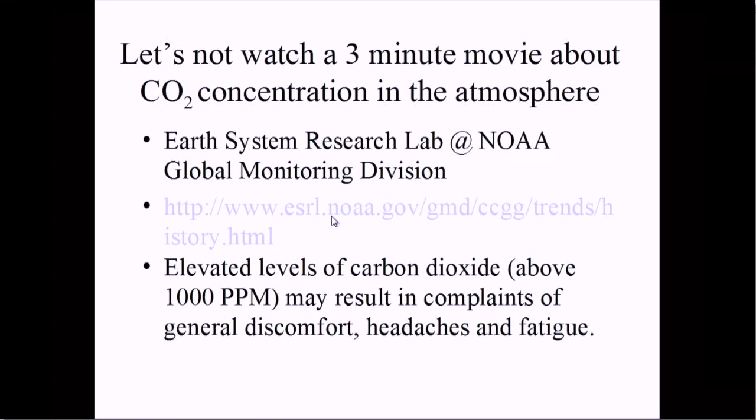So if you go to this website, you can watch a 3-minute movie about CO2 concentration in the atmosphere. It was done by the good folks at NOAA, and I won't go through it completely, but we've been monitoring the CO2 in our atmosphere very closely since 1958. And it doesn't look too bad there. It looks like a nice linear curve, which will eventually go to infinity.

But the question is, what's the slope of that curve, and what does it look like in the long term? So if you look at that over the long term, going back to early man and woman, and we can measure this by bubbles in the ice cores that they've been measuring. So these are different data points. You can see that it does fluctuate, and so people are always saying, well, global warming is a natural fluctuation, but really it never gets above 300 ppm until about, well, here's the Lascaux Art Cave.

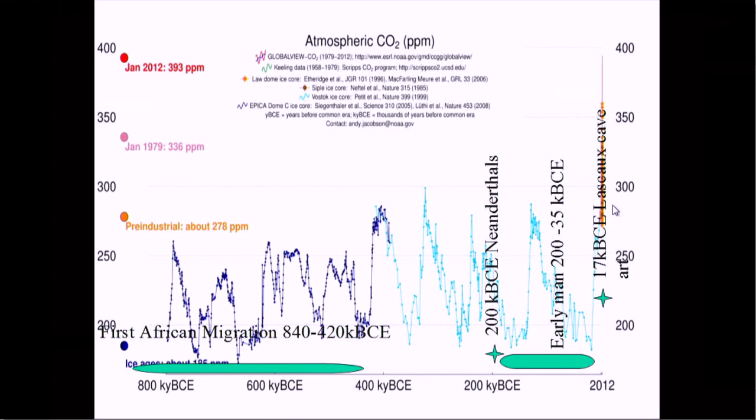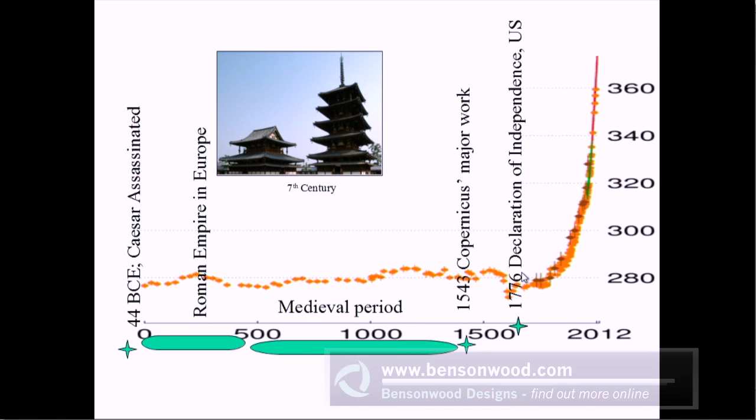So let's zoom in on that orange bar, and you can see that even after Lascaux, through the Roman Empire, through the medieval period, I like to show what we were doing with wood in the 7th century here in Japan. Carbon dioxide is still pretty low. And then, well, I won't blame this on the Declaration of Independence, but that's really when it starts to jump.

So this is, sorry for jumping around here, but this is an infographic that was down in Boston this summer in a show that I'll talk more about later, but it charts the history of trees over that time as well. And so 320 million years ago, trees started. And you can see that we did a lot with trees, but right about here, 1830, lumber shipping, balloon framing, this is when the sawmills, the Industrial Revolution really started taking over.

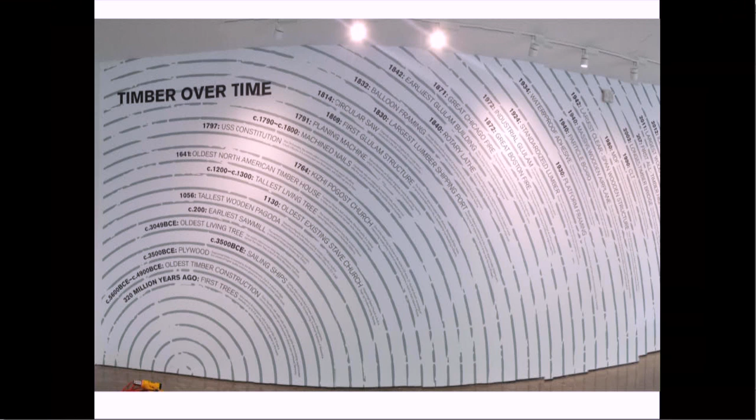And in 1871 and 1872, there were two large fires in urban areas in our country that sort of turned people off of wood, the Chicago fire and the Boston fire. And that, combined with the cheap energy window opening, really started paving the way for steel construction or iron construction to come online in the urban environments.

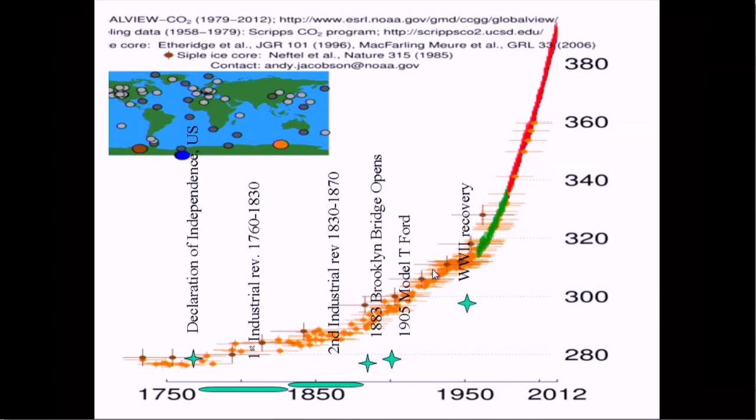Now, when you think about that CO2 graph and you think about the world population growth, it actually is a pretty interesting mirror of one another. And so the question is, where is this CO2 graph going to go, and where is the world population going to grow? So this is the world population over the last couple thousand years. And here's the predictions out of the UN as to where we're going to go.

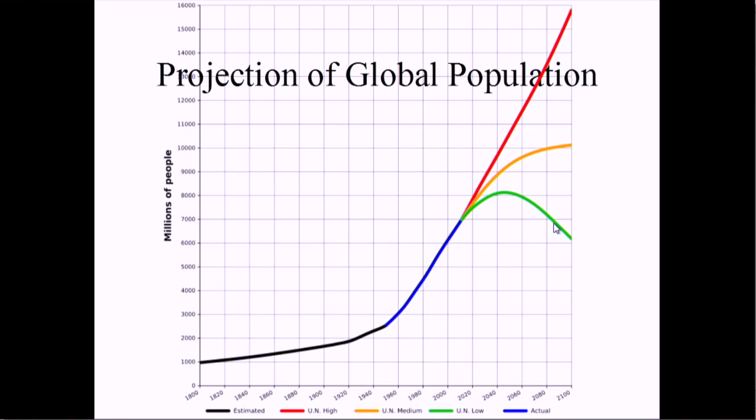Are we going to go on this red line and have 16 billion people? Or are we going to curve off, or are we going to have some major problem and start going backwards? Or some other reason to start going backwards. Right? It doesn't have to be a problem. It can be a recognition of a problem that we might have. Absolutely.

And so we think that there is a problem with the carbon dioxide concentration at 400 ppm. Scientists are saying 350 actually, and that the 2 degrees C is pretty much inevitable at this point. Right. At 1,000 ppm, people start to get tired and have headaches, and so if we get to that point, we're definitely in trouble. So we can argue about where the best point to be is, but we know we're on a bad track right now, and we need to do something about it. And so what we need is solutions.

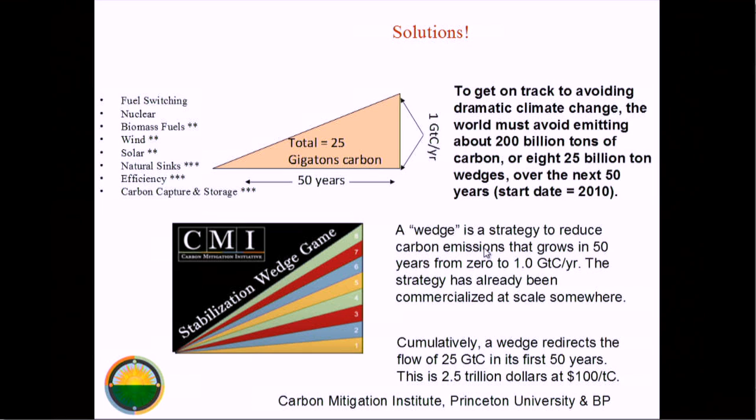So a couple of years ago, the Carbon Mitigation Institute, a group out of Princeton, came up with a way to visualize the carbon problem. So here's the historical carbon emissions, and this is from 2010 to 2060 if we stayed on that same projection where we're headed. They took this triangle here and they said this is the theoretical stabilization triangle.

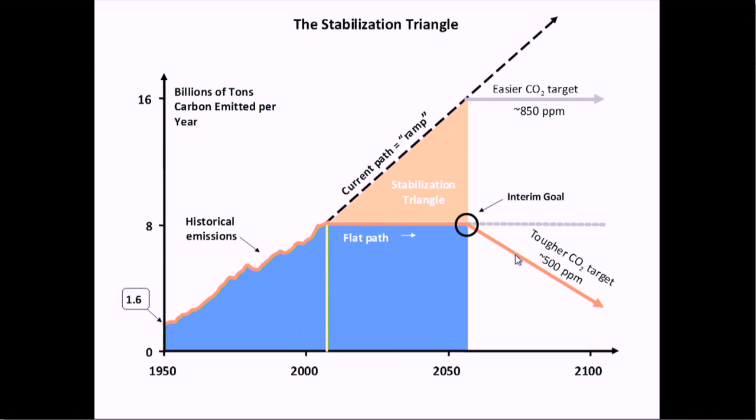If we can not put that triangle into the atmosphere, we can stabilize our climate, and then maybe eventually we can actually start turning around and getting into something that's more what we want. The UN has said that in their best case projection, we would be in a carbon negative economy by 2060. That would be wonderful. So I think we can do it before that. And that's probably where that is, 2060, headed negative. And we need to. We need to for our kids and our grandkids and their kids.

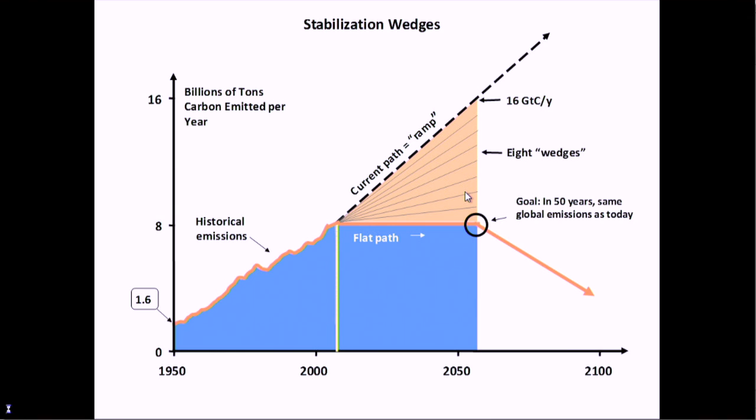Yep. And so they took this stabilization triangle and, like good engineers, they broke it down into smaller problems. They broke it down into 8 problems. And they called each one of those a wedge, and each wedge represents a certain amount of carbon. And these wedges are things that we have done as a global society that are demonstrated technologies that can be done. So we can do this. And actually this is 5 years old. So we can do this exclusively relying on technologies that we already have developed.

Exactly what I'm saying. This is 5 years old, and the technologies have changed. The stuff I'm seeing at 40 cents a watt is just outrageous, the way technology is changing. So we can do it sooner than 2050. We can, absolutely. I have no doubt of that.

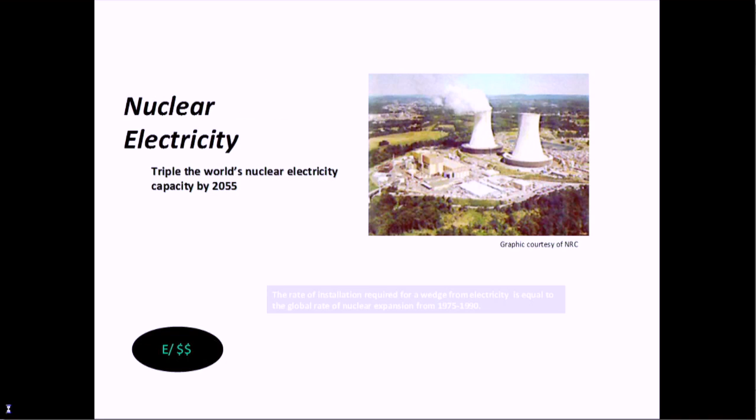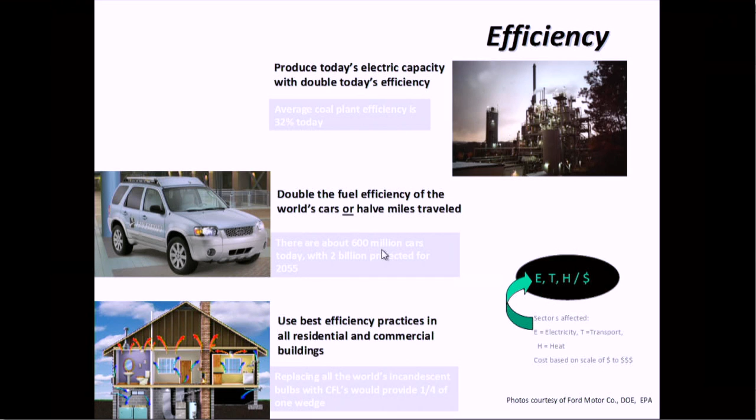So some of these have problems or are expensive. Nuclear electricity takes a long time to build a new plant, but some of them are not that hard to do. Wind is not that hard to do. Solar is not that hard to do. Planting trees is not that hard to do. Efficiency is something that Rhiannon and I work on every day. Carbon capture, you showed the early thing in the last show.

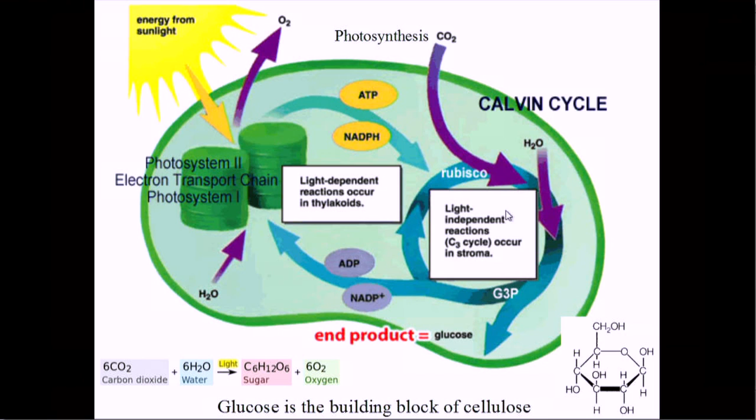And the beauty about doing this, instead of pumping it into a hole in the ground that it's eventually going to escape from, is that while it's being stored, it has use. We're living in it. And it's beautiful, and it provides for a comfortable life. So this is how energy from sunlight turns into glucose, which eventually turns into cellulose inside of the plants.

And so I've been going around telling people we're building these wedges, these 1/8 of that stabilization triangle, for a number of years here. This is a project we built in Maine that had a bank of solar panels on the roof. It also had a bank of solar panels in an old abandoned tennis court nearby. And this project is net zero, LEED platinum, FSC, Forest Stewardship Council certified wood throughout. It operates with no annual electricity costs.

And this is in northern Maine. Does that include heating? Includes heating, includes everything. Lighting, heating, everything this person requires, outside of transportation, probably. This is not a person, this is an institution. The Coastal Maine Botanical Gardens in Boothbay, Maine. Oh, yes, of course. And we built this between them closing one fall and opening one spring. So we built this in the dead of winter in northern Maine, mostly in our factory, which is in New Hampshire.

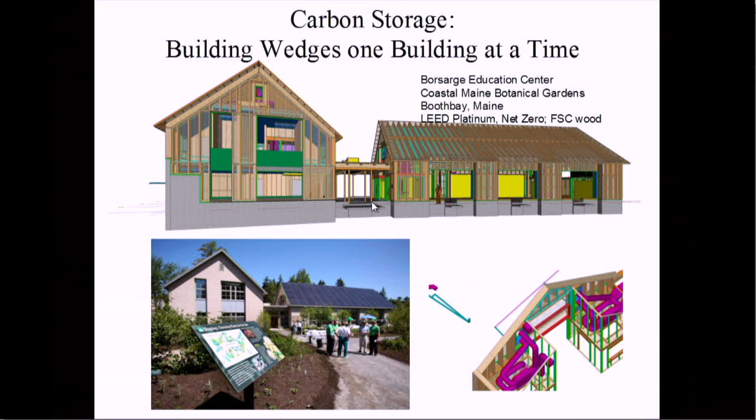Right, so you can see how we are modeling everything in CAD, and we take those sticks and we put them through a CNC process, and we build them up into our highly insulated large panels. And so this is what wood is. It's cellulose, which is basically 50% carbon by weight. The glucose molecules get bound together, they turn into cellulose molecules, they turn into these long fibrils and fibers, and those fibers turn into wood. They're basically big bundles of cellulose straws.

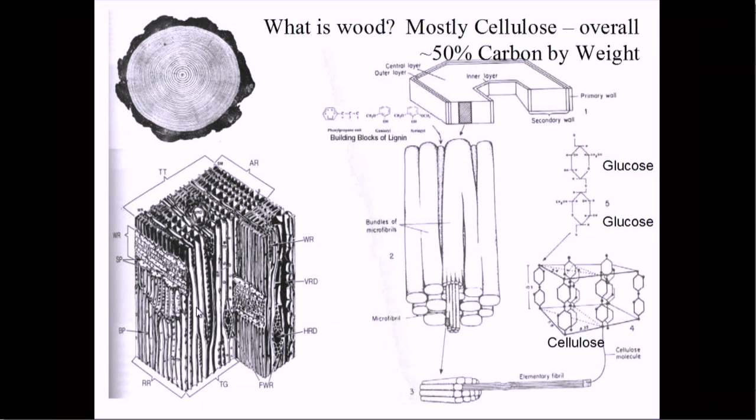Which is why wood is strong. Yeah. It's because you've got a lot of not terribly strong, but very long and somewhat strong fibers that are all bound together. The superorganism. Yep, they're all working together, and that makes wood strong. But we can also pulverize this wood and turn it into insulation, which we do now.

I wouldn't say we've completely abandoned the foam core stress skin panels, but in a lot of our buildings, we are now using cellulose insulated panels. This is made out of old recycled books that get ground up and injected into our panels and give you very high R value, again R30 to 60, depending on thickness.

Do you use cloth for this, clothing? That kind of thing? No, they do sell cloth insulation, but this is old books that they grind up. Old books. Yeah, and the beauty of this is also when you're putting this insulation into the panels, some of

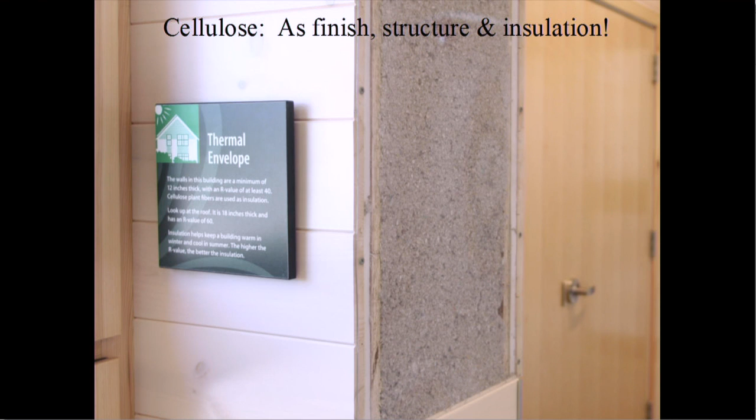it inevitably falls on the floor, right? So what do you do with that? Well, if that was foam, and it's curing, you got to put it in the landfill. But here we just sweep it up and throw it back in the hopper, and it goes into the next panel. So there's really almost zero waste when we're building these panels.

I've been talking about these wedges for a long time, and I was so excited this March when an article came out in the Journal of Sustainable Forestry that really looked into what wood can do on a global scale. How many wedges or how many tons of carbon dioxide can it fix? Or by using it instead of steel or concrete, can it avoid being emitted?

What they found was that, I'll just read it, it could save 14 to 31% of global CO2 emissions and 12 to 19% of global fossil fuel consumption using between 34% and 100% of the world's sustainable wood growth. And sustainable is very important here. Absolutely. That means you're not wrecking forests doing this. No, the wood that we get comes from forests that are replanted at a rate equal to or higher than they're being cut and used. So we really are continually fixing carbon from the atmosphere.

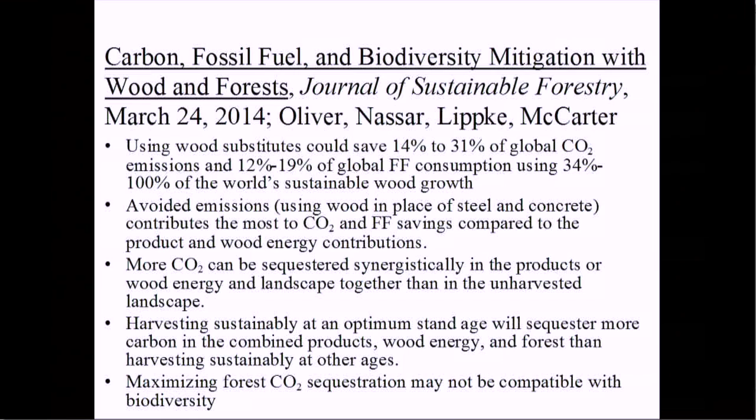I want to point out something, and that is that I promised people that we were going to show how Bensonwood was going to save the world. And I think we're showing that. We're getting close. But we don't want to be the only ones. Bensonwood, we're the tip of the iceberg. What we need is a movement here, and it's starting. It's starting in Europe, it's starting in Australia, and I want to show you some examples of those.

I think that Ted Benson should get some ping pong players and go to China. Well, we have a rich history with Japan. We have not really made contacts in China, but it's not too far away.

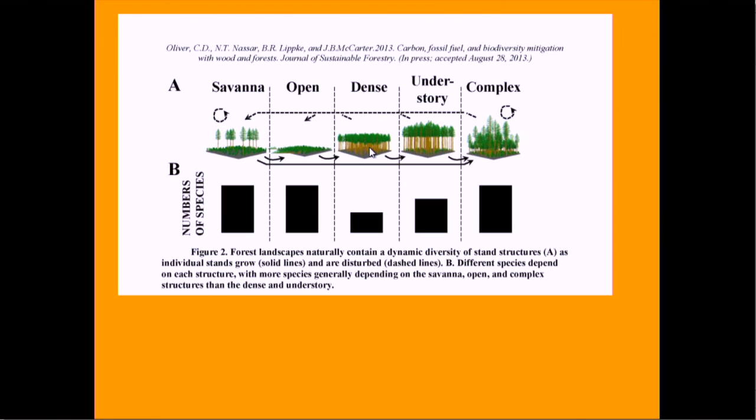I do want to point out that there are lots of different types of forests, and if your only goal is to sequester carbon, you probably want to use this dense forest. But that is not our only goal. Our goal is a sustainable planet, and recognizing biodiversity and the resources beyond wood in the forest is important too. So by using certified forests, we're allowing other types of forests to develop naturally and exist in this world.

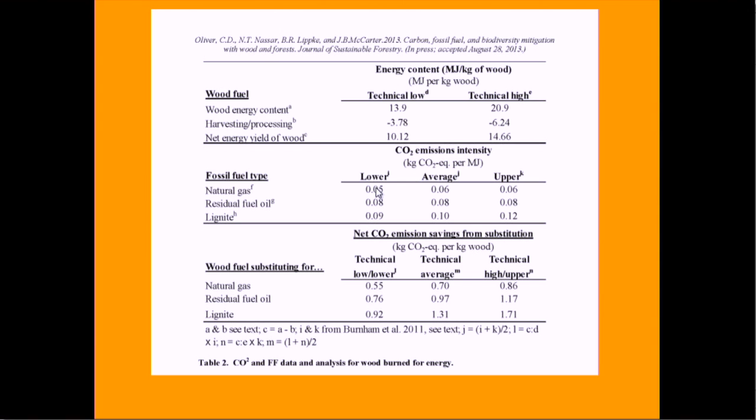So in this article, they looked at how much energy it takes to make wood, how much energy is in the different types of gases and fuel. They looked at how much energy it takes to make steel, concrete, brick, aluminum, all these things. And if I can stop you just for a second, concrete is one of the biggest sources of carbon emission. 3 to 5% of global carbon emissions are due to the annual use of concrete. It's a very considerable thing.

And if we could reduce concrete use by 50%, which is conceivable, we could reduce carbon emissions by a lot. And in fact, if we did it properly, we could be reducing it by more because we'd be sequestering carbon in the process. Exactly. Right. So this is a very big consideration. And that's exactly what these graphs out of this article show.

So when you're talking about I-beams now, you could be making skyscrapers out of wood. We're going to get to those. They look at the forest management. We'll put this up, but don't flip back to it yet because I want to keep on these. So that's where we're going. We're going to wood skyscrapers, mass timber for dense urban environments. This is amazing. It's what we need to do. This is really thrilling. Yeah, it's exciting to be a part of this industry right now. The innovation in wood technology has really evolved dramatically.

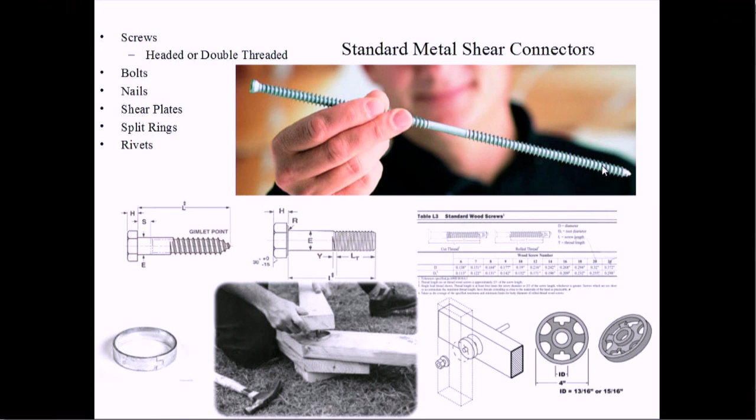Right. So along with these new wood products, we've also got new connections, screws that are a meter long. I can buy a meter long, fully threaded screw now. That's incredible that I could do that. Why do you need that? That's a much more complicated thing. But we can build amazing buildings. Look at that. This is the Cathedral of Christ the Light in Oakland, California.

Wow, that's impressive. This thing has been built. To give you a sense of scale, the concrete at the bottom is 12 feet tall. These glulam arches are 128 feet long. This is in Oakland, California, which is a seismic zone. Is that a photograph? Yes, this is a photograph, not an artist rendering, not somebody's wild imagination. No, it's real. It's real.

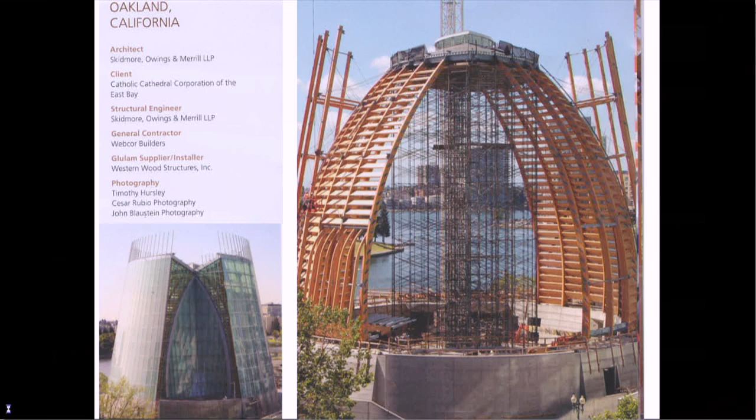This replaced the cathedral in Oakland that was destroyed in, I believe, the Loma Prieta earthquake. This was the third place design. The Catholic Church had a design competition, and the first place design went into design development, and they couldn't get the project in budget. So they went back to Skidmore, Owings and Merrill, and said, "Can you do this for the budget?" And they said yes, and they got the job, and they just built it.

Look at the scaffolding on that. They put up this amazing light fritted oculus, and they brought these glulams down on the boat from British Columbia, because you can't truck something that long. Oh, of course. How long are those things? 128 to 130 or something. Are those things called crucks? You might call that a cruck, yeah. That's a modern cruck.

A cruck, for anybody who doesn't know, is those beautifully shaped trees out in the woods where the trunk of the tree is curved. And if you can find a bunch of those that are matched to each other, you can use them as structural members in a building where you have a curved roof. They used to do that in the Middle Ages. Now we make them to the shape we want them, instead of growing those trees for 300 years like they did at that abbey. This is absolutely astonishing.

Obviously, Oakland is high seismic, so there's a lot of steel cabling that reinforces this thing, but it is an incredible space. How tall is that? Well, that's 130 feet or something like that. So you've got a building that's 150 feet tall that is made out of wood. The structural elements are wood, pieces 130 feet long that are curved, and the thing is going to withstand the kinds of earthquakes you would have in California.

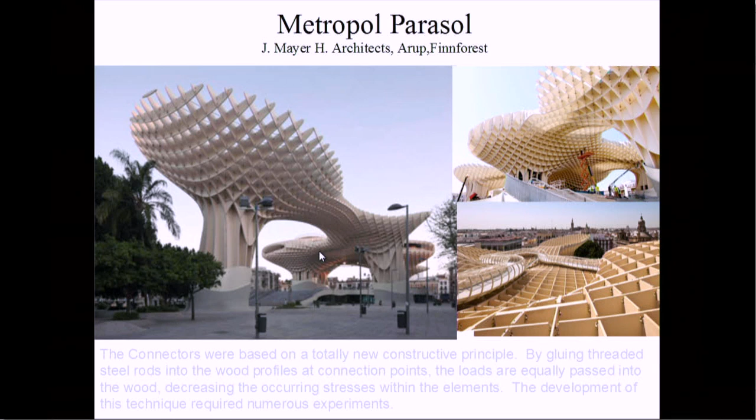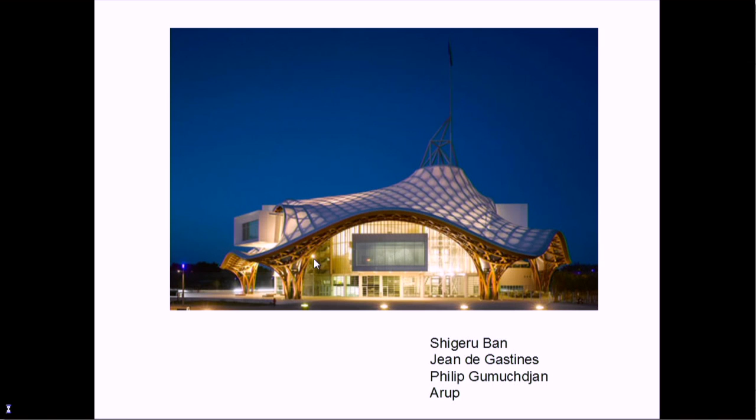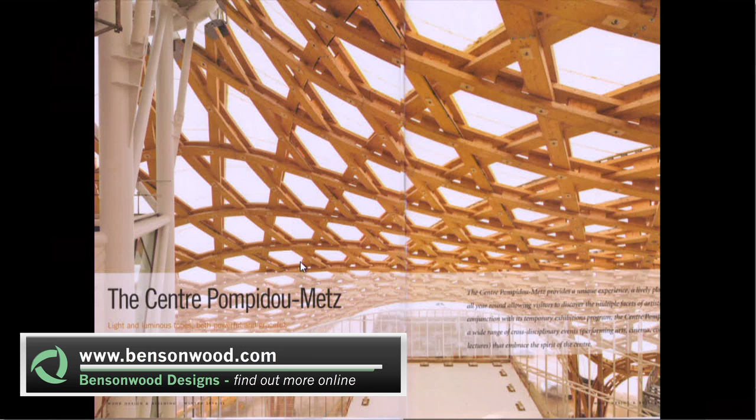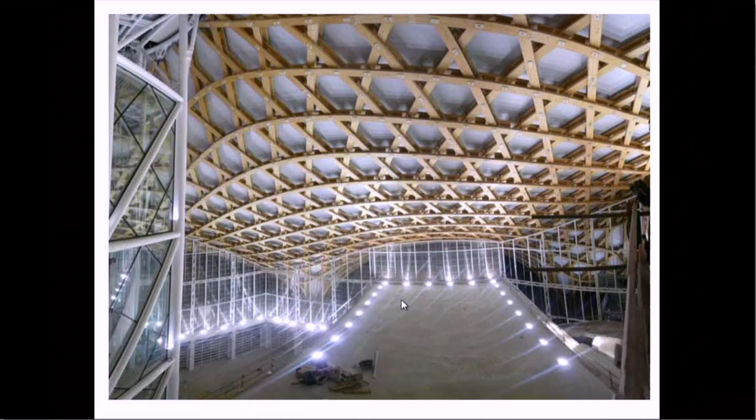Shigeru Ban, Pritzker Prize-winning architect, made this beautiful woven wooden canopy that is just incredible, what we can do with wood now. Look at that. That is stunning. That is absolutely stunning. I'm jealous of the poor engineers that got to look at all of these bolts and nuts and how they're connected. Well, this is why you want a screw that's a meter long. Right. Here's a shot of that same area at night. Oh, isn't that connection detail stunning? Oh my goodness gracious!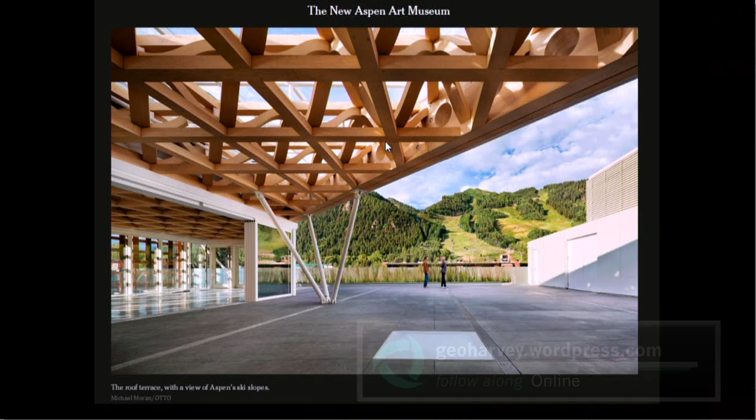But what I love about this building is the roof on the fifth floor, that you go up and have a drink at in the bar. This is a 3-foot deep assembly of a two-way truss that has these sinusoidal waves that are at a 45 degree to the main top and bottom chords. And I think it's 50-foot spans in here. Sinusoidal means curvy in a particular way. Yes. I think it's a modulated sinusoidal wave, but

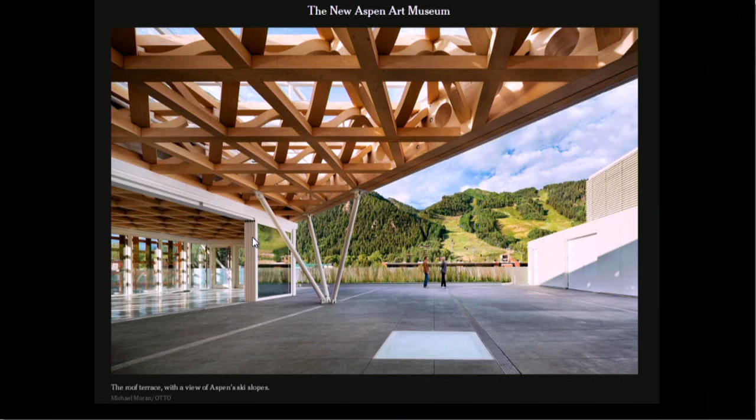we don't have to get into details. I just want people who are watching to understand what the word means. But this is Aspen, Colorado. Heavy snow load on a flat glass roof in Aspen. You're looking at the mountain, it's a ski run, isn't it? Yeah, spanning 50 feet out of wood. And this is all wood. Obviously, the columns are steel. That was an architectural statement, but it was a pretty incredible project. Oh my gosh! Look at this.

Here's a soccer stadium in Germany by this wonderful engineer. If anybody wants to learn about wood engineering, look up Julius Natterer. He's really the modern father of timber engineering, in my opinion. This is a soccer stadium that used solid logs for the main primary support structure, and then I believe glulams on top. And actually, this project used a timber concrete composite shell roof system. So on top of the wood decking, they were able to pour concrete to create further spans and give it more protection.

And so what I'm showing here is called cross-laminated timber, and this has been the biggest innovation in wood in the last decade. When we talked about glue laminated timber before, all the laminations were in the same direction. Right. Here, we are laminating pieces of small lumber orthogonal, or 90 degrees, to each layer, and we can do it in 3 layers, 5 layers, 7 layers, 9 layers. And that's where we get these 8 feet wide by 60 feet long members.

And I'm looking at this and I'm thinking, for a person to understand what's actually going on here, if you were to take a piece of the old type lamination in which the grain is all going in the same direction, you could actually split that with an axe. This thing, it would be a very long day. Absolutely. But it was really invented in the 90s in Europe, and it can compete cost-wise and structural-wise with poured concrete, with reinforced pre-stressed concrete.

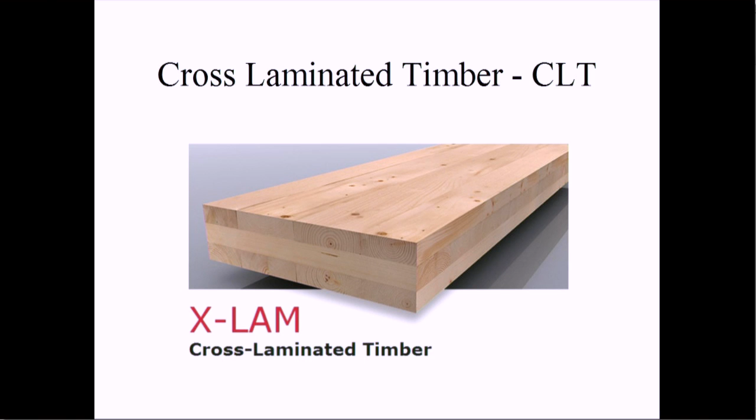The pre-stressed concrete industry can build a building very affordably. Now the laminated timber industry can build these buildings. We can span 30 feet pretty easily with these planks. We can build 20-foot walls pretty easily with these. This is a 3 or 4 story condominium that was going up in northern Quebec last year. The company in Quebec that makes the CLTs decided to build some condominiums in town. And so here they were using them for the walls, for the roofs. You can see the floors.

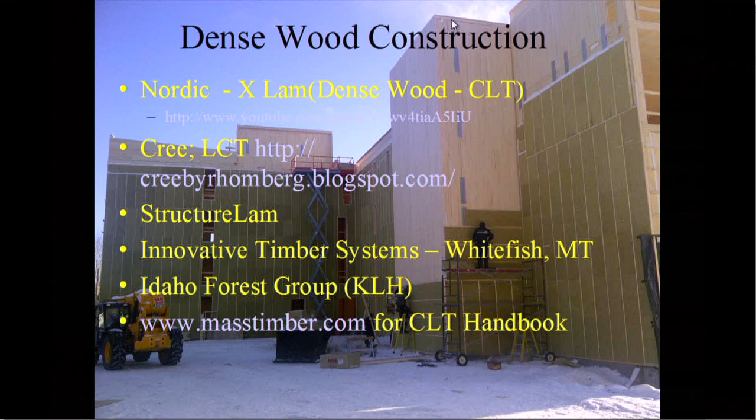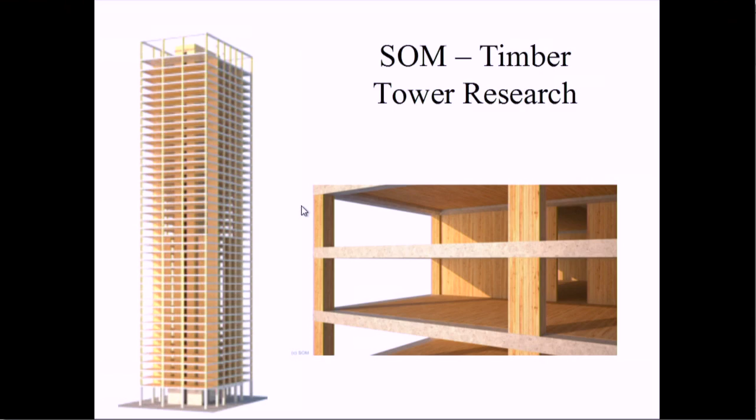As they got into it, they realized that there were some places like this ring beam where they wanted to use concrete for structural reasons. So eventually they didn't go to an all wood building, although they could have. But even here, comparing timber and conventional structure, this is wood, the orange, the steel is just a little red bar, and then the concrete is here. So the volumes are pretty similar, but because the wood is making up so much of the volume, the building weight goes down tremendously. Interesting. And when the building weight goes down, the foundation can be smaller, and we're not using as much concrete in the foundation as well.

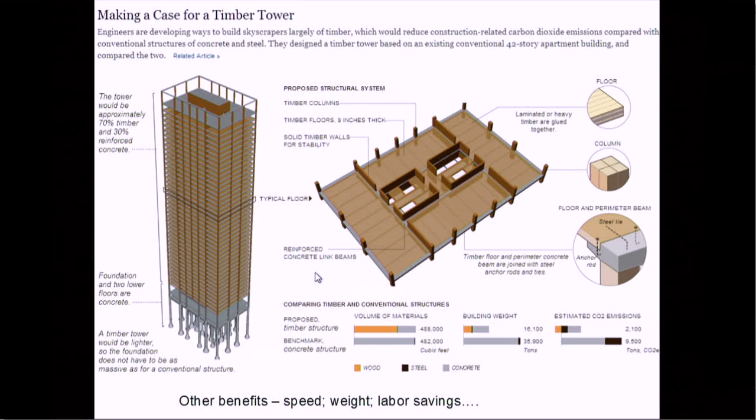Interesting. So when you look at the net CO2 emissions coming from each of those, you've got timber actually negative because it's storing, and then the steel and the concrete adding. So the carbon footprint is cut. Cut dramatically. So the same building out of concrete and steel is 9,500 versus 2,100. And these are innovations we don't normally take into consideration when we think about saving carbon.

Right. Well, we've talked about some interesting carbon-saving technology on this show, carbon farming and things like that, which most people just don't think about. Right. The idea of letting the grass roots go down farther. It's an interesting thing, but this is something where I'm gonna differ with you here. I think this is gonna get sexy. Well, with enough architects out there, it's definitely starting to get there.

What's going on here? We just lost our feed. Oh dear. There we are. It's just come back, it was sleeping. I think that was the computer objecting to the fact that nobody had touched the mouse. Yeah, I think you're right.

Okay. So this project here has been built in Austria.

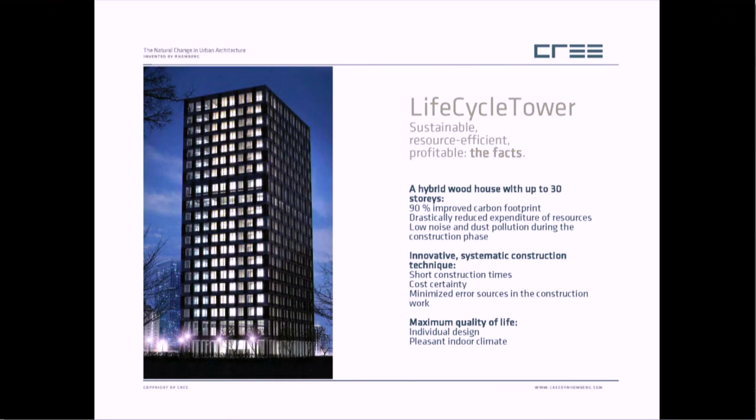A large Austrian contracting firm that actually does tunnels and highway and sort of civil projects decided that they were going to champion sustainability, and they were going to build a wood skyscraper. I love it. And it's going to be to Passive House standard.

So here's a cross-section detail of a timber. They actually did go to a concrete composite timber floor system because you can get a little bit more span out of it, and there's some fire rating and serviceability issues there that concrete does good things. Fire rating is of course important, and I will talk about that. Concrete is nice for that. Yeah.

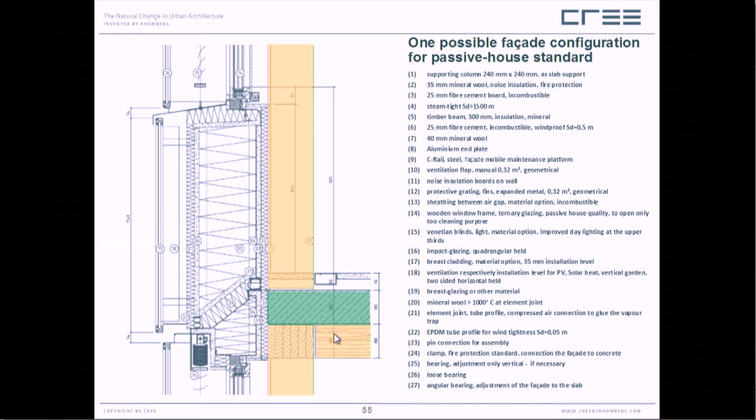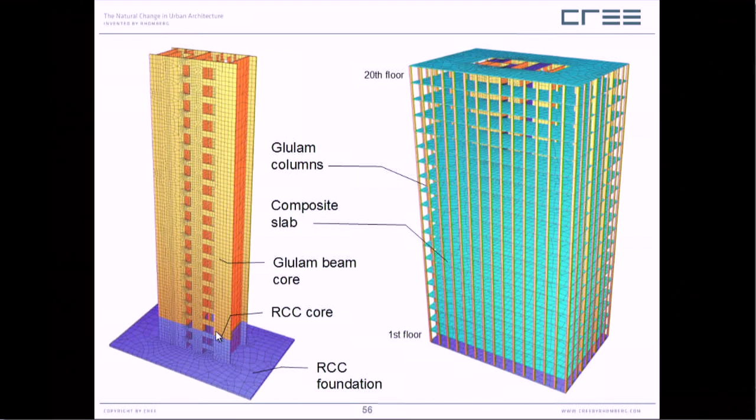But here's the structural model of what the buildings could be, glulams, and basically only the foundation needs to be reinforced concrete. And here's an example of one of these types of constructions, the same company. The first thing that came into my mind when I saw that was I could just imagine what Frank Lloyd Wright would have done if he had had this available.

Well, I'll tell you, this architect Hermann Kaufmann, he's got a good hand. He's a bright guy. He makes some beautiful stuff.

Yes, absolutely. And so here's a section again through the office building where you've got this glulam concrete composite floor system, and in between it they've developed these prefabricated factory mechanical modules that will slip up in there either to provide heating, ventilation, or lighting. And so everything can get built off-site, and these buildings go up week by week, floor by floor, basically a floor a week, which is drastically different than what a conventional site-built concrete or steel skyscraper would be.

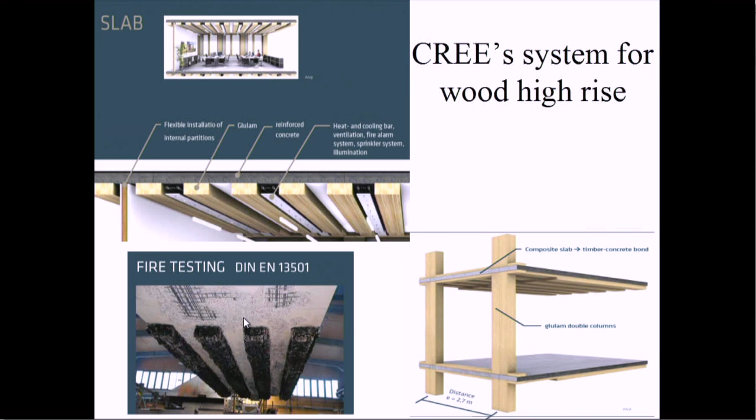In terms of fire testing, obviously that's one of the biggest things to overcome, but a lot of research has been done on fire testing, and wood has this amazing ability to insulate itself as it burns. It develops a char layer, and that char layer is an insulator and prevents the wood on the core of the beam from charring further. And so you can get out of these buildings before they fall down, basically.

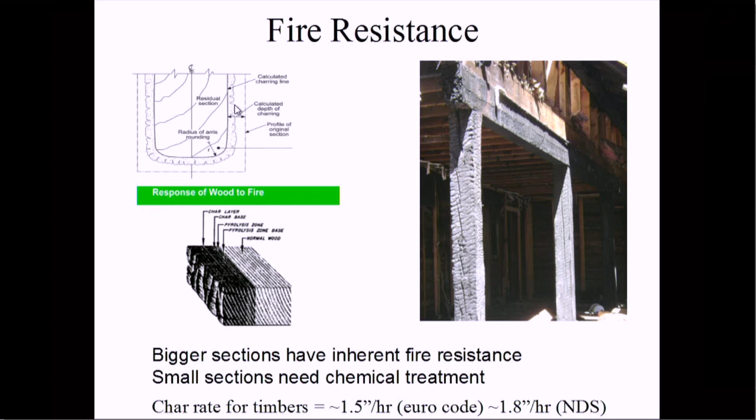And that's only true with the big wood. Yes, it's a function of surface to volume ratio. Yes. And so 2x4s, 2x6s, those big fires in the cities in the 1870s, those were smaller dimensional things burning, not the heavy timber. Yes.

But unfortunately, the codes were written to not allow wood construction above 4, 5, 6 stories. And that's what's currently in our code because of the history of stick framing. Well, what they should do is they should say, this isn't wood.

Well, that's one approach, but we are changing the code, and we've gotten these cross-laminated timbers and these glulams in the new versions of the IBC and the IRC, so that they can fall into the heavy timber category of the code. But eventually, we're going to get to the point where it's going to be a performance-based thing, and anything will just have to satisfy it.

And of course, as I see that, I think about the World Trade Center collapsing, and the fact that that was just a matter of the steel not being able to, and the concrete not being able to take the heat. Well, it certainly wasn't wood.

So this is stick framing in the lower left, heavy timbers in the upper right. I think you can tell, if you were a smoker, where you'd feel more comfortable lighting up is probably under the heavy timber roof, as opposed to starting a fire over your head.

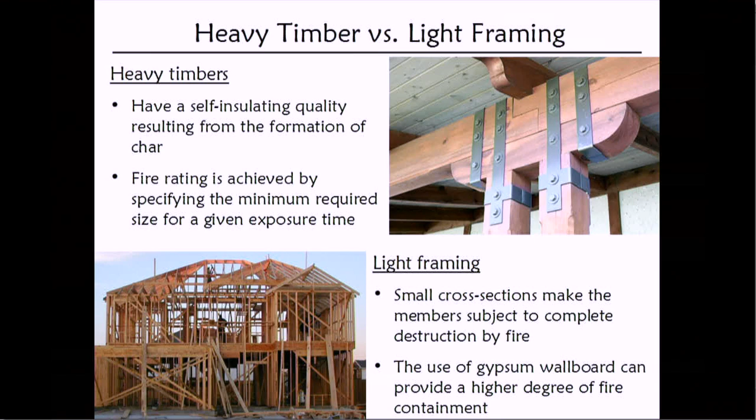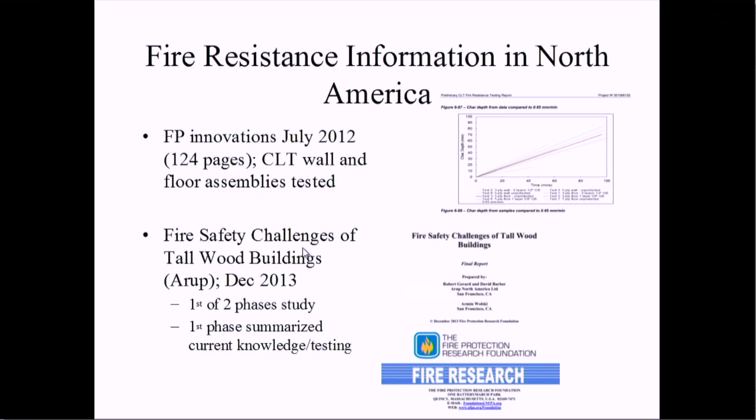So a lot of research has been done on heavy timber and CLT and the fire performance of it, and so we can make arguments to local code officials to sort of get around the code case by case, and that's what we have to do these days.

The USDA has just, well, they haven't actually announced the rules, but they've announced that there's going to be a competition with a $1 million prize to design a timber skyscraper in our country. And this announcement will be coming out probably in the next week. It was supposed to come out in September. Hasn't come out quite yet. But if you're interested, write down U.S. Tall Wood Building Prize Competition and get on the mailing list so you know about it, because I don't want to be the only one entering.

When you win, you can be on the show.

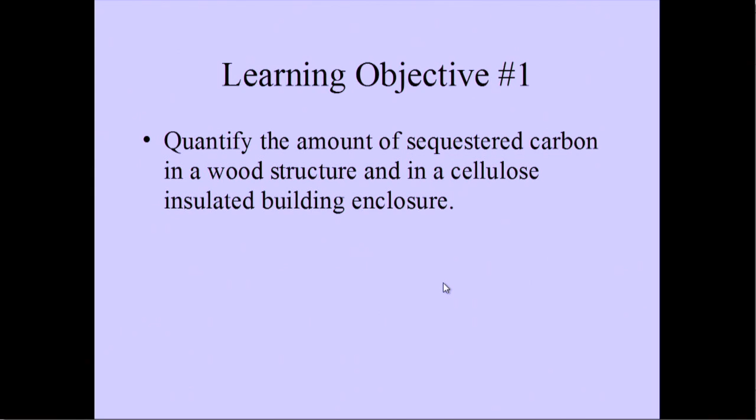So I'm an engineer, so I always have to talk about calculations, but basically, wood is 50% carbon by weight, so a kilogram of wood is a half kilogram of carbon. You do some molecular math to figure out what that is equal to in terms of carbon dioxide. Oxygen is a lot heavier than carbon, and it's a bigger component. You've got 2 oxygens for every carbon. Right. So here's a simple one, that one everybody can do probably.

1,000 kilograms is 1 metric ton. You do the math with all this, and then you add in that wood basically weighs about 34 pounds a cubic foot. You do some more math, and you figure out that a cubic meter of wood sequesters about 1 metric ton of carbon dioxide. And I like simple one-to-one things to remember, so that's something I can always remember.

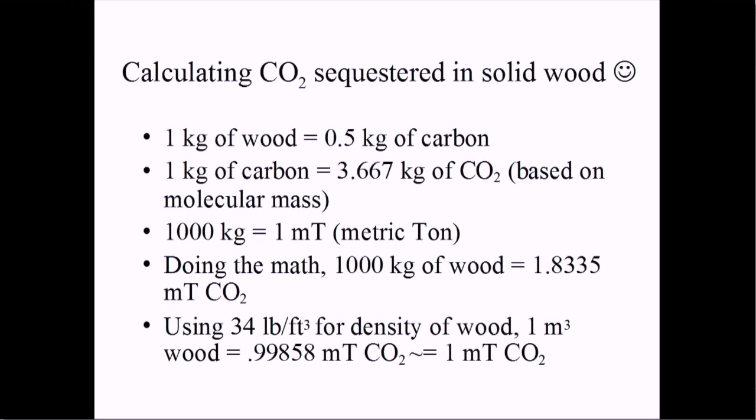I think a lot of people are going to have difficulty visualizing a cubic meter of wood. It's big. It's about 40 inches by 40 inches by 40 inches. Right. I'm currently designing a school in Connecticut that's going to sequester about 500 metric tons of carbon dioxide. So it's going to have 500 cubic meters of wood. This is going to be built by Bensonwood? We sure hope so. That's a very cool idea. Yeah.

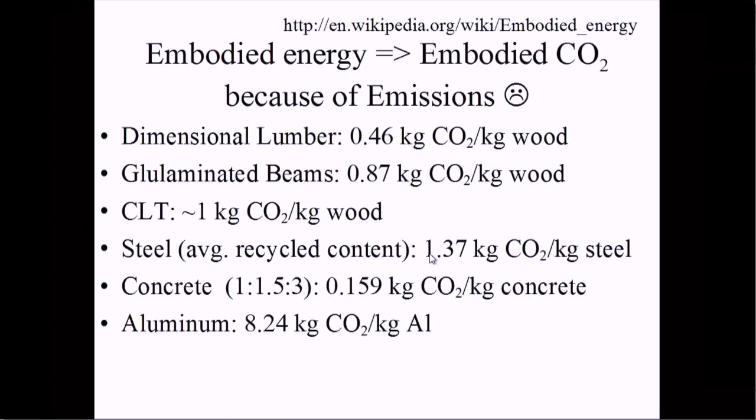Unfortunately, wood does take some energy to make these products, and so you have to balance that back in. It depends on how much processing and drying and glues you're using, but even with the most engineered wood, there is only about a kilogram of carbon dioxide emitted per kilogram of wood. I just put these down here to show you that steel and concrete and aluminum also emit, and they don't sequester anything. Right. So these are the big only emitters.

And so when you add the emissions to the sequestering, most often the wood is still carbon negative cradle to gate. So from the tree to the job site in place. Obviously, what happens after it, if it's burned, that carbon goes back into the atmosphere. If it's buried, it eventually goes back into the atmosphere. Or not. Or if it's fixed by something else. Yeah. But it could be reused. Right. We could take these down.

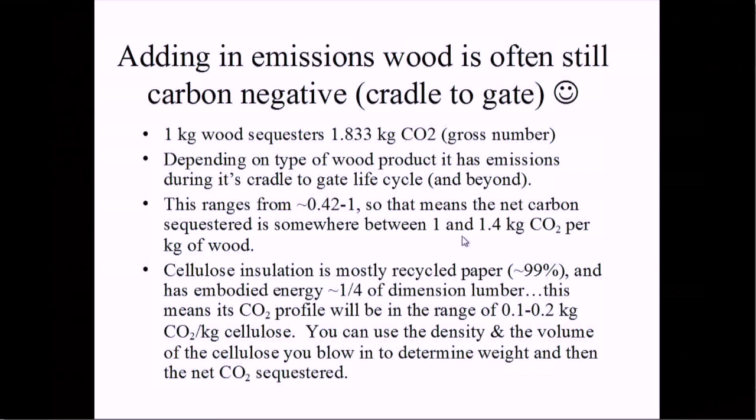Right. And so basically, we're sequestering somewhere between 1 and 1.4 kilograms of carbon dioxide per kilogram of wood. Right. And that's the important thing. Steel, concrete, aluminum, you're never going to do that. You're not sequestering anything.

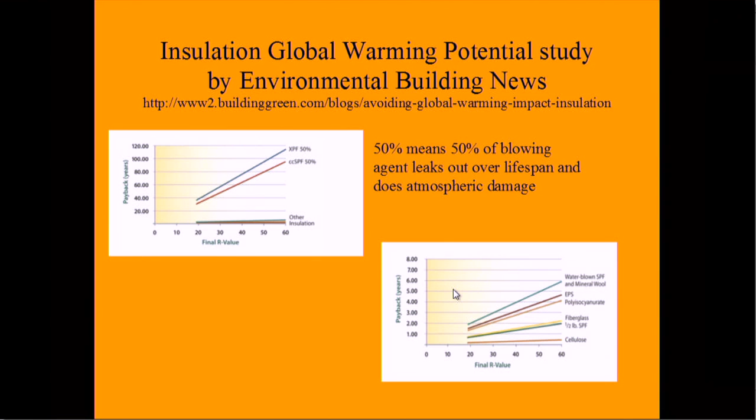We can look at our insulation in the same way. These are some highly toxic to the climate foam insulations. This is the group of other insulations. And when you look at the other insulations blown up, the one with the best climate performance is the cellulose down here at the bottom. And that's because it's a carbon-based sequestering product. So the very fact that you're using that insulation means that you're sequestering carbon. Right. Now this is important for people to know. Right. And carbon is important.

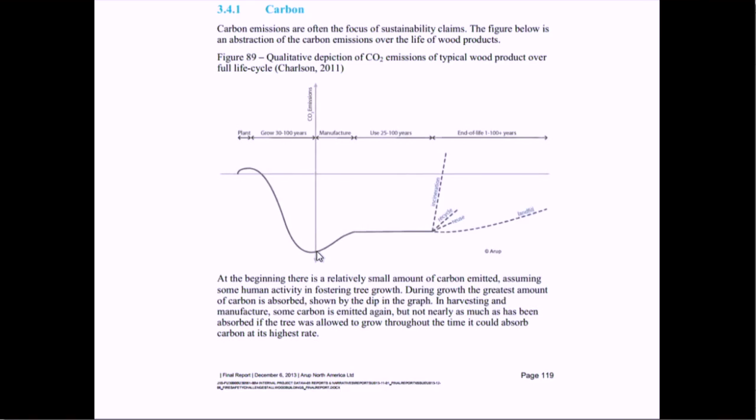And as long as when you cut this down, you're growing other trees, we're continually fixing carbon from the atmosphere. And so this is a graph from Cree, the 30-story building I was showing you before, where when they looked at carbon in their building, they actually found that the whole building was carbon negative, or nearly carbon negative, 92% of a wood building versus a concrete building. So this is 90%. I think SOM came up with 75, 80%. So we're talking about significant reductions.

And that's what reinforces the message that Journal of Forestry, 34% of carbon emissions if we went to all wood construction instead of steel and concrete. It's a big amount of carbon.

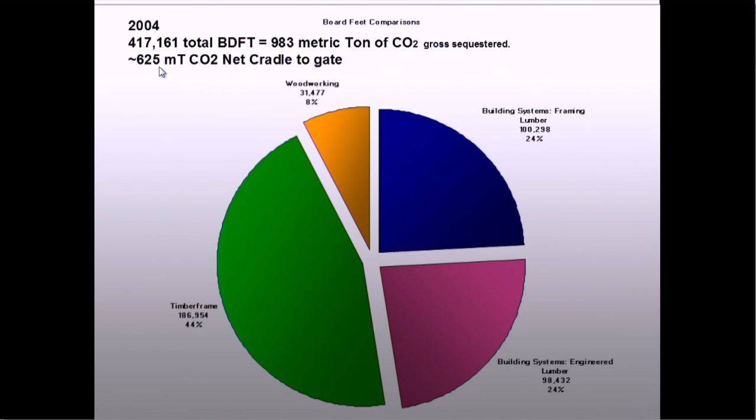Yeah, it is. The last time we had time to actually look at our board foot total of wood at Bensonwood was 2004. It probably hasn't changed too much, although it is now increasing again after this little downturn in the economy. We break it down by timber framing, dimensional lumber, engineered lumber, which is the glulams and I-joists, and then our fine high-end woodworking. And so annually we were sequestering 625 metric tons of carbon dioxide. There's a spreadsheet I've written to help me analyze it anytime I want.

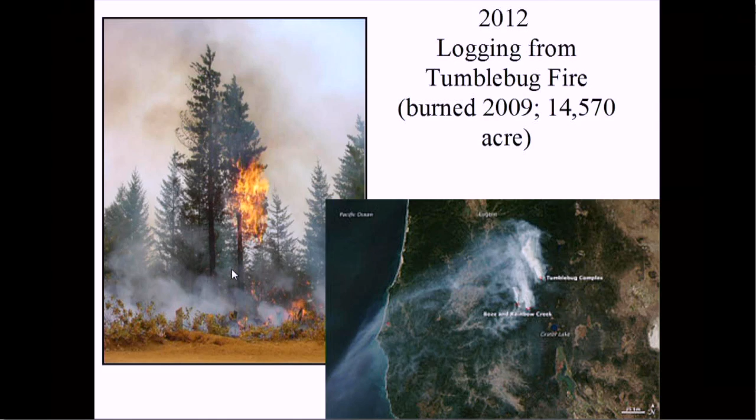And I think the important thing is to know where your wood's coming from. When we're using the large solid sawn timbers, we're buying it from this small company in Oregon, and what they're doing is they're harvesting standing dead trees that were burned in fires. So we're not cutting down thriving ecosystems, we're cutting down something that was burned. And they're not cutting down all of it either. And of course the wood isn't damaged in the fire. Right. For exactly the reason that you were talking about earlier. Right. The char insulates it.

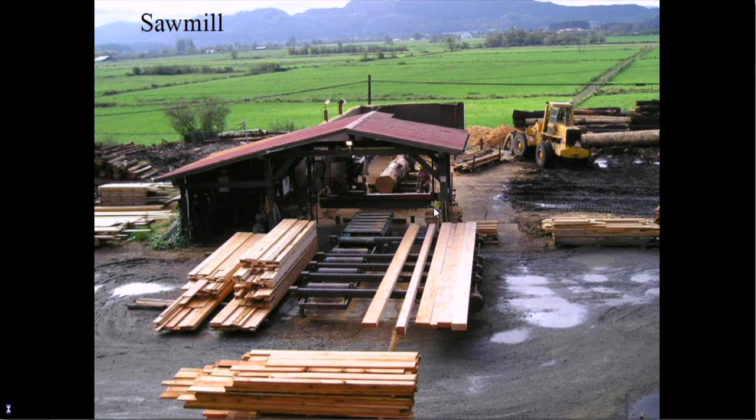And of course one other thing too is that it's loaded with water. And it's hard to get that water to be converted to steam, which is what you've got to do before the wood will burn. So this wood is as good as any other wood that's out there. Right. It's actually better because it's drier. And so it's going to move less as it comes to its final equilibrium moisture content. Yes. So these are what their job sites look like. This is what their sawmill looks like. We know these people very well.

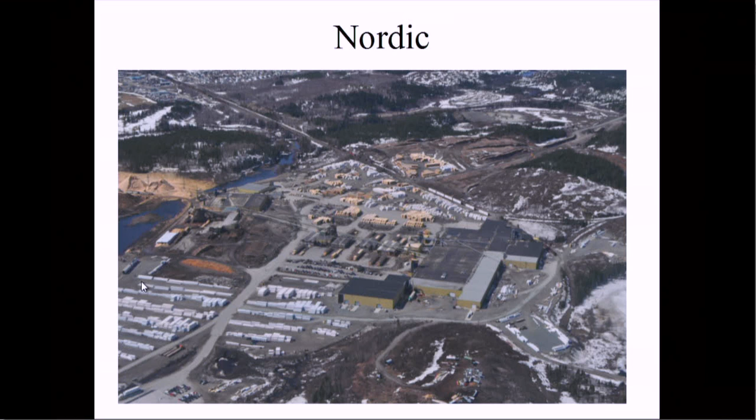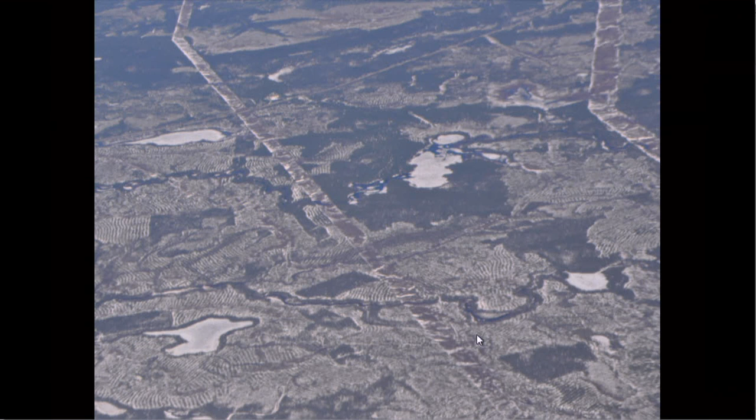Now, sort of on the other end of the spectrum is this company up in Canada where we buy a lot of our engineered wood products from. This is their plant in northern Quebec. These are all bundles of engineered lumber that go on trucks. And this is an aerial picture of their forestry operations. You can see all these little baby trees growing. And this company is 4 generations old, so now they're cutting the trees that their great-great-grandparents planted 4 generations ago.

So Bensonwood has recently joined the FSC certification chain of custody group. FSC is the Forest Stewardship Council. It is the only independent, non-industry sponsored, LEED recognized forest stewardship certification available. Right. And that LEED recognized says a lot. Anybody who's listening, watching, should understand that really says a lot.

Right. And it's actually more than just the forest. It's about the indigenous populations, and making sure that they're not being taken advantage of, or slave lumber or whatever. Yeah, exactly. And it's about education, getting people to understand the importance of proper forestry. All of which gets included in some of these standards. Right. If you're using your LEED building to educate people, that's part of the standard.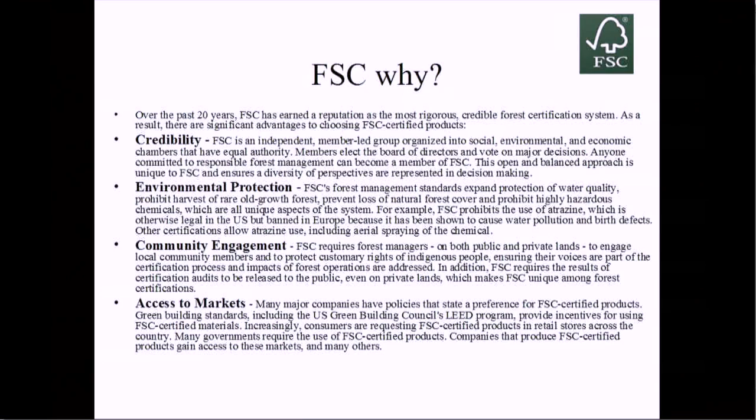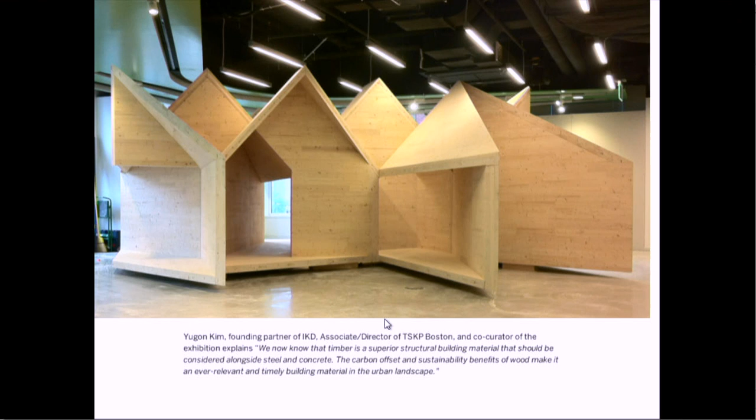This is an exhibit that actually just closed last week down in Boston that had a lot of great infographics about wood and urban environments and how it can save the world with carbon sequestration. It will most likely be opening up again on the UMass campus, although it might be somewhere else. UMass actually is going to be building a heavy timber building, 5 stories tall, in the next 2-3 years. The state legislature just appropriated, I think, $3 million as a timber demonstration project. Very nice. And this is a project that I did the engineering with a team of architects out of New York City, all made out of this cross-laminated timber.

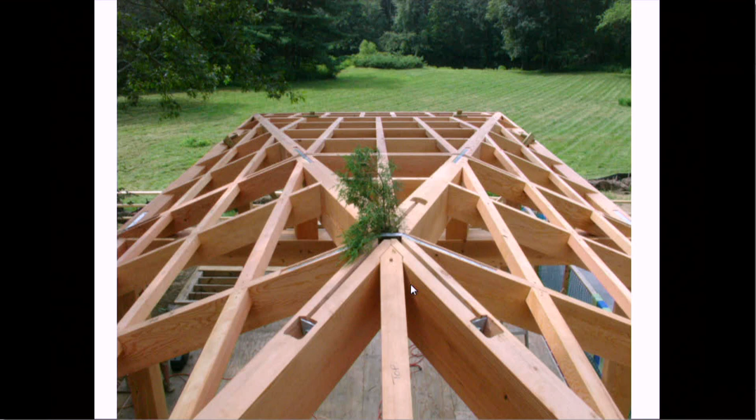So I'll just show you some of my favorite projects, because I like to. Yeah. Does anybody know what time we started this segment? Do you know, Tom? I think we've gone over an hour. I don't think we have, actually. I think we're good. I think we're right around there. Keep it going. Oh my goodness gracious!

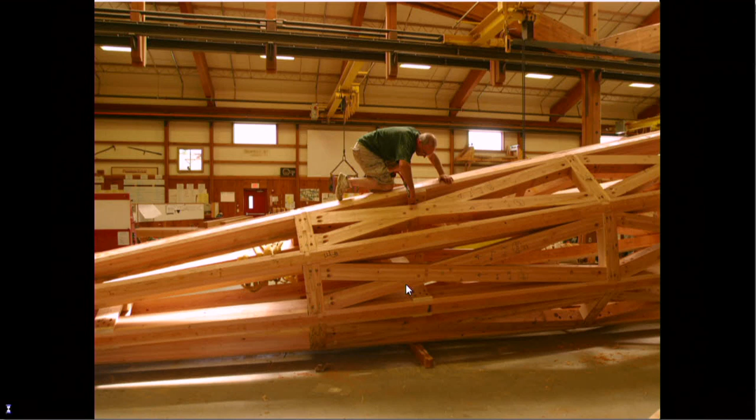Look at that. So this is actually the steeple right next door here in Brattleboro. Is it really? Yes. This is looking up it in our shop. This is our prefabricated steeple.

We loaded it onto a truck horizontally, and we picked it up in one pick of the crane and put it up in the air. Interesting. Yeah, it's a block from here. We drove by it on our way. I had the copper ball on my desk for 3 months.

Wow. But this was all engineered glulam timbers. This is Douglas fir. And then we used local hemlock to sheathe it, because hemlock is abundant here, and we didn't need the engineered properties. Yeah, and unfortunately, hemlock will not be abundant here for very much longer, I'm afraid. With the woolly adelgid, no. But it does hold the slate real well.

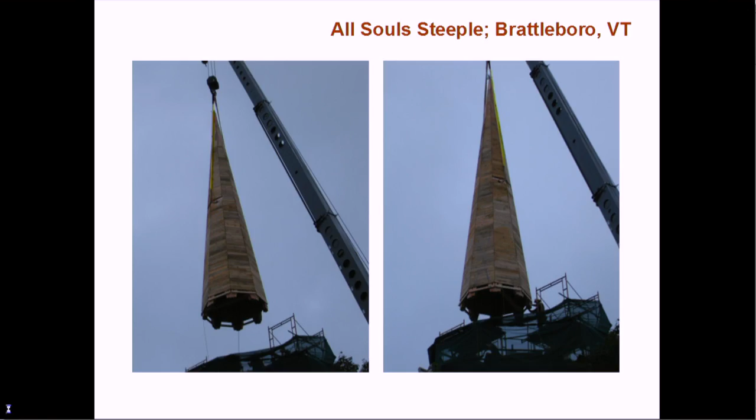And we can blame climate change for that if we want to. And anybody who says climate change isn't really there should go out and talk to a woolly adelgid.

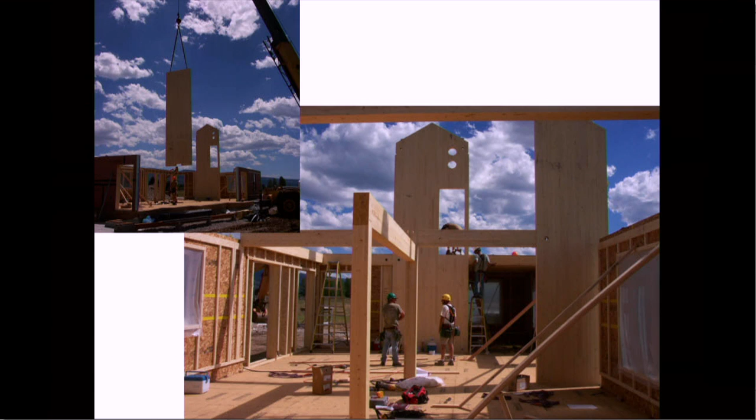Oh, here's some of those. There's the long, 8-foot wide. That was a 30-foot plank. A 30-foot plank. That's 3 stories. Ladies and gentlemen, here you see a single plank, 30 feet long, and what is that, 8 feet wide? 8 feet wide. And 1 foot thick. Wow. And you need to have a fairly heavy piece of equipment to move it, because it's not the sort of thing you can throw in the back of a pickup truck.

Right. And the other side of it is identical, but they shaped it. Well, this one went up to the roof. It had a doorway in it, and these 2 holes are for some spiral duct that winds up going through it in the end. So it's basically the same thing, 8 feet wide, 30 feet long. Yep. There were 3 of them in the building. And we were able to make some connections to the beams.

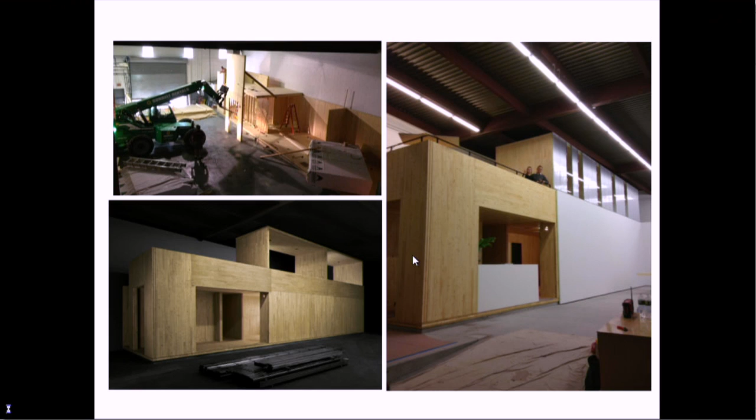And this is a gallery down in Brooklyn, New York, inside of an old garage or something. So we were building the ship in the bottle here, also made out of cross-laminated timber. You can see the cross-laminations on the edge grain here. Quite a beautiful little space.

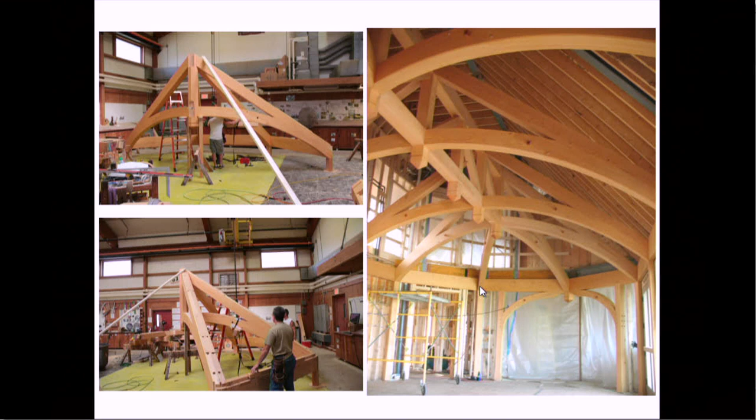Here's some more. Here's some glue laminated curves that we fabricated. Actually, these are not curves. I'm sorry. We would have liked to make these out of curves, because then you can have the fibers being continuous, but the client didn't want that. So we had to make a scarf joint in the middle of this thing, and that's what those two cherry keys and that peg are about.

So these are two pieces that were sawn, and we didn't want to do it out of one because that would have been just the removal of too much fiber. The structure couldn't handle it. So again, fabricating it in our shop, pre-fitting everything, making sure it's going to go together quickly. And this was another ship in the bottle where we were installing this from underneath.

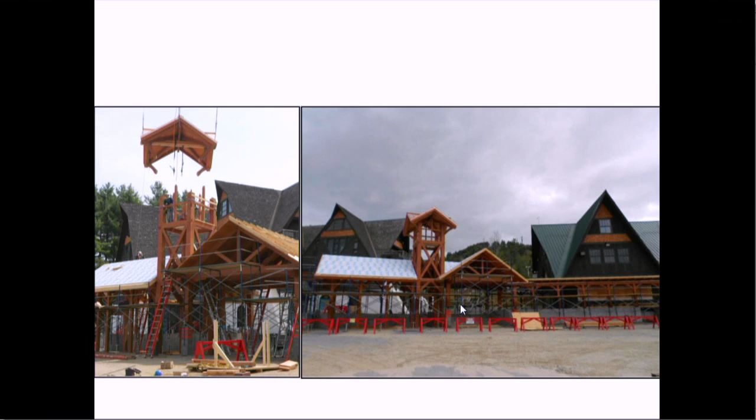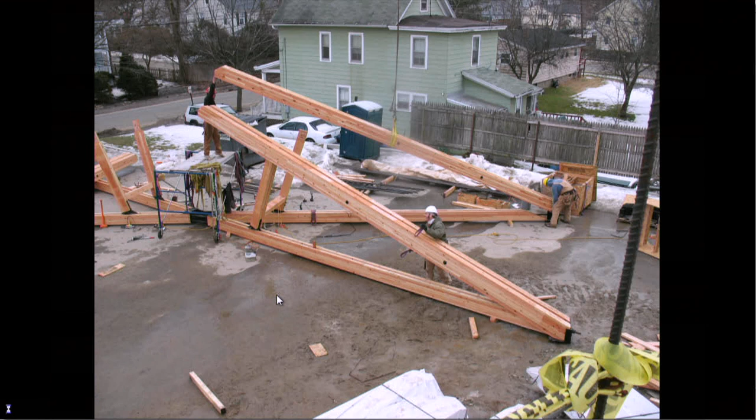Here's the Pat's Peak ski pavilion that went in a couple years ago over at Pat's Peak in Henniker. This is a large carport made out of glulams down in Pennsylvania in the Poconos. Amazing. This is all amazing. This is a 70-foot long roof for a church, 70 feet across, 3-dimensional truss, building in the shop and then building it again on the parking lot.

And then this really speaks to me the most about the craftsmanship of our team and the ability to bring 1, 2, 3, 4, 5, 6, 7 pieces of wood and land them all on the top of one post with the joints that tight. It's just incredible.

And that commitment to quality is what permeates our whole company, whether it's about the timber joinery or a non-toxic, non-polluting wood solution or an environmentally better building envelope or window design. That's what we are about. So again, we can save, using wood, 14 to 31% of carbon dioxide emissions globally.

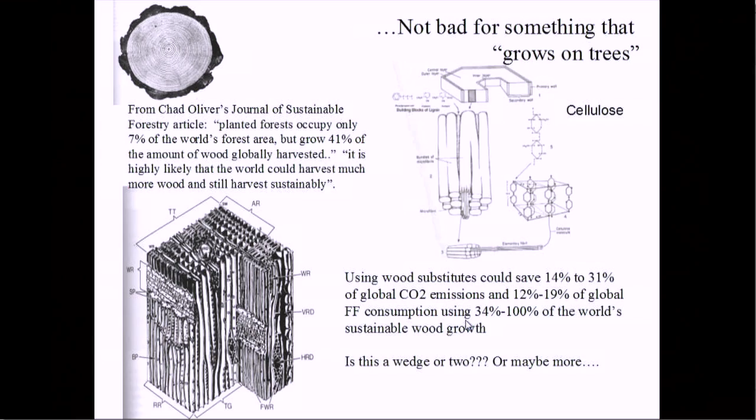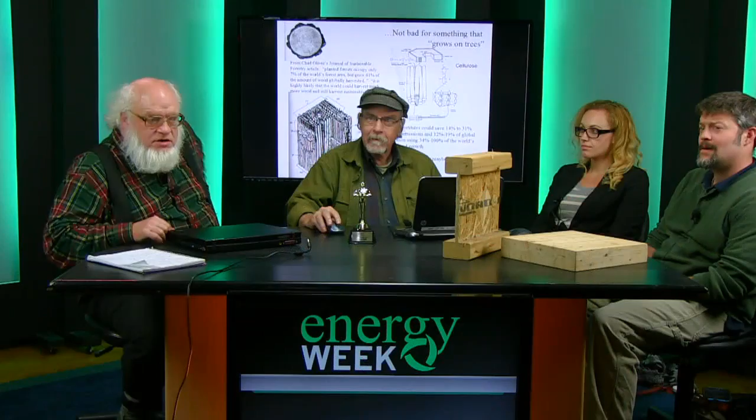Great. Yeah. So, sorry I went on so long. Rhiannon didn't get to tell you much about what she does. Well, you can come back sometime. You can tell us later. I think we'd better say goodbye. I don't know that they're going to be able to get this into a single hour. They'll figure out some way to splice it.